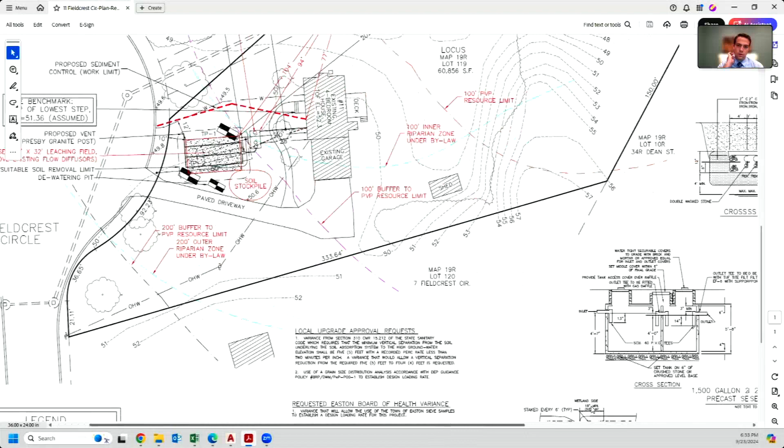Any questions from the commission on this one? Pretty straightforward, again a repair on a failed system. I think some of the feedback you got, and I just haven't seen enough of the plan to see if it's been revised, but is there a professional land surveyor stamp on here? Yes, there is. Very good. I also am seeing some notes about some small piles of lawn debris near the wetland. Yeah, I know, we added note number 8, just calling out the lawn debris near the wetlands to be removed by hand specifically. Okay.

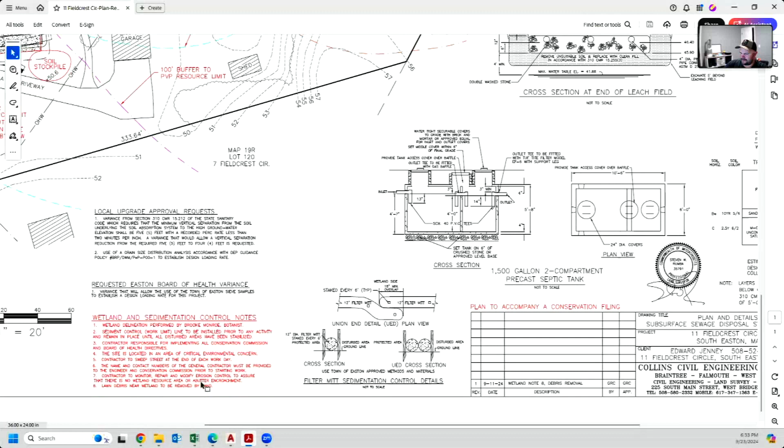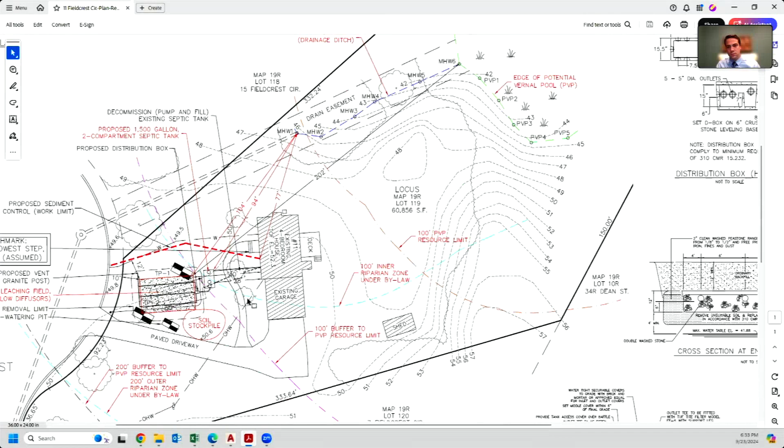I think that's all I had for questions here. Staff comment? Peter, this is just under the bylaw, is that correct? Yes. Okay, no other questions for me? Any other members of the commission? Any members of the public here tonight to discuss 11 Fieldcrest Circle?

All right, seeing none, Peter, I assume you'd like to close. Yes, please. Motion to close the public hearing for 11 Fieldcrest Circle. Benson, second. Carol motion, Benson second, roll call vote. Benson, aye. Carol, aye. Spady, aye. Vecchio, aye.

Motion to issue a negative determination of applicability, noting a -2 under the bylaw only. Spady, second. Carol motion, Spady second, roll call vote. Benson, aye. Carol, aye. Spady, aye. Vecchio, aye. Thank you, Peter. Thanks, guys.

So moving on to our next order of business, continued hearings and possible deliberations. First up is 557 Foundry Street, which is a notice of intent for redevelopment of Swifts Park. I think if I recall, we were waiting on a DEP file number here. Correct, we did receive that. It's 152-1821. Okay.

Is anyone here for this? I don't see Stephanie. I don't think there's an engineer here. As I recall, I think that was the last piece we were waiting for, and we've discussed the project as a board. Yeah, we have the revised plan with the surveyor stamp on it now, and we'll condition just changing around the plant species. All right.

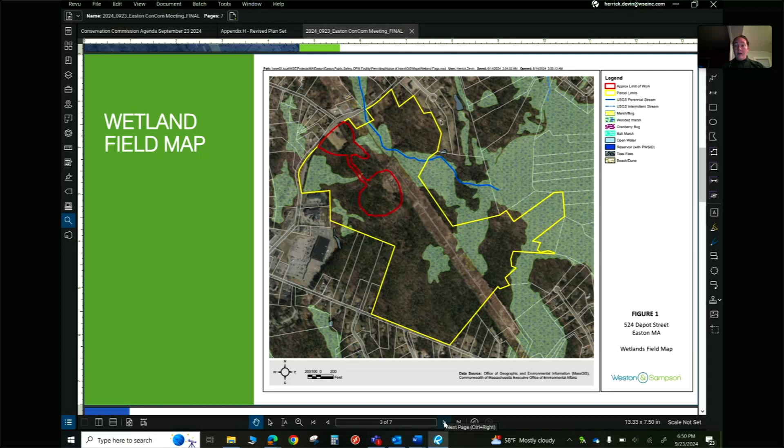So I believe everyone is familiar with the project team. As a refresher, we're looking at a site that is only a portion of a much larger lot. The approximate site is shown here in red. The wetlands are not perfectly shown because this came off of the Mass DEP layer, but just as a reminder, the wetlands end up crossing this access road in two places. On this southernmost crossing, there's an intermittent stream that goes through as well, which is resulting in a good chunk of our impacts.

About 2 meetings ago, we submitted some updates to some of the wetland resource areas. As a refresher, we're looking at some temporary impacts associated with some proposed debris removal. There's quite a bit of trash that was left out on this site from some of the previous activities, so this project does propose to remove a good portion of that, including 3,545 square feet within the BVW, which we are calling temporary impact.

We had also submitted a restoration plan to go along with this. We also have the temporary matting for equipment access to allow for that bridge construction, in the location of 2 crossings for that access road. The temporary mats were increased to be 12 feet in width, which resulted in 966 square feet of temporary impact to BVW, 256 square feet of temporary impact to land underwater, and 24 linear feet of temporary impact to bank.

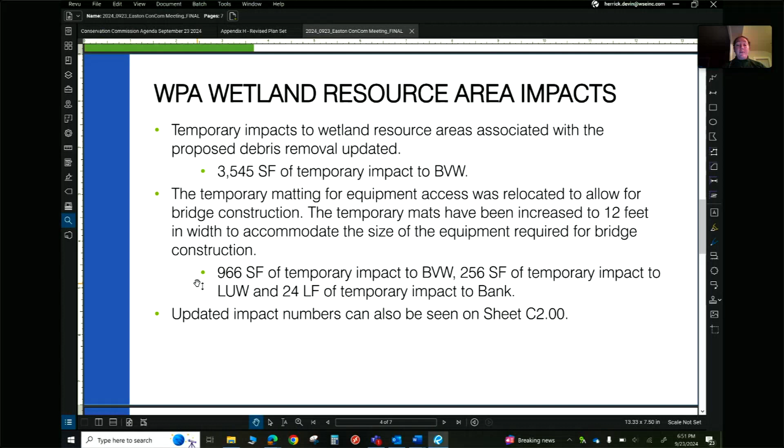Here's a table giving a summary. In total, we would be looking at 4,511 square feet of impact to BVW, 24 linear feet of impact to bank, and 256 square feet of impact to land underwater bodies.

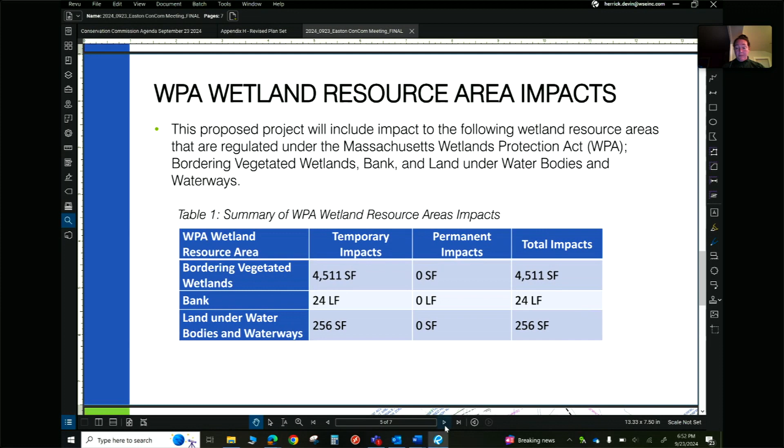Here's that trash mitigation plan for anyone who may be interested. As a reminder, it's kind of in patchy areas located throughout the site, but portions of that fall within the wetland, other portions fall within the buffer zone, extending up into the area of proposed development.

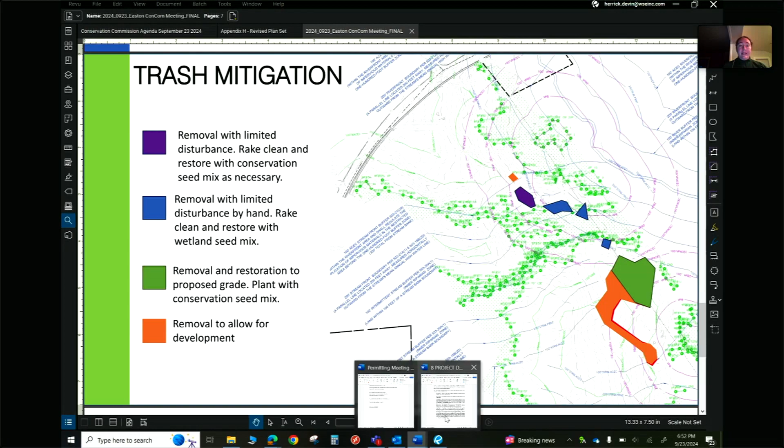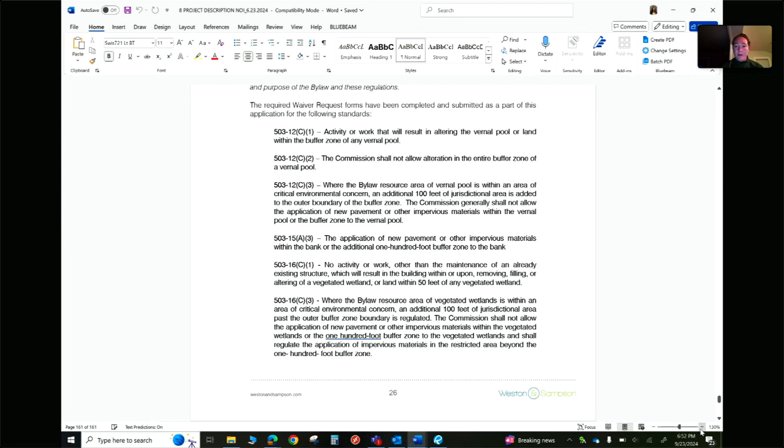I do also have here our list of all of the waivers to performance standards that we had sought. Let me see if I can make this a little bigger, because I'm realizing that's probably quite small on your screen. Starting at the top, we have a request for a waiver for activities or work that will result in the altering of a vernal pool or land within the buffer zone of any vernal pool.

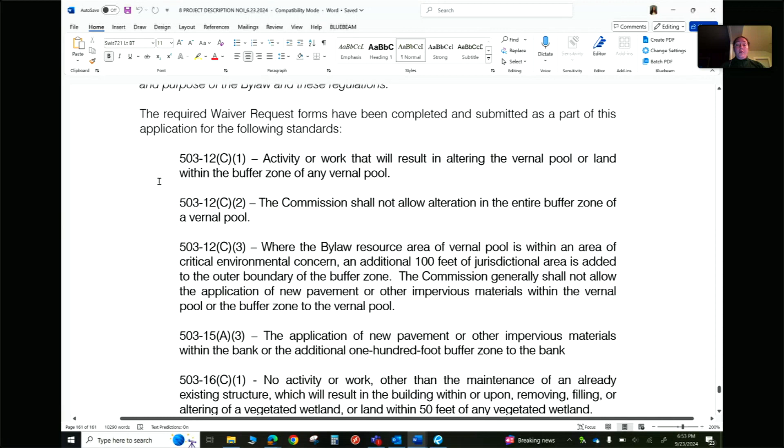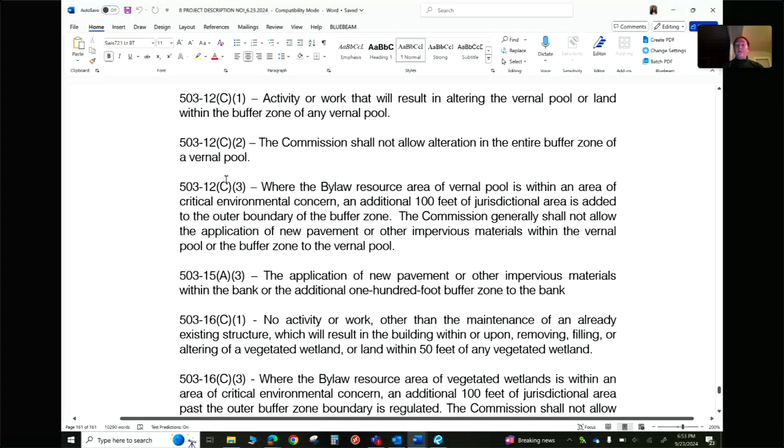We have a request for a waiver to allow alteration in the buffer zone of the vernal pool. I guess this is just C1 and C2, so we submitted waivers for both of those as memory serves. We also have C3, also associated with the vernal pool, within the area of critical environmental concern, where you're adding that additional 100 feet of jurisdiction.

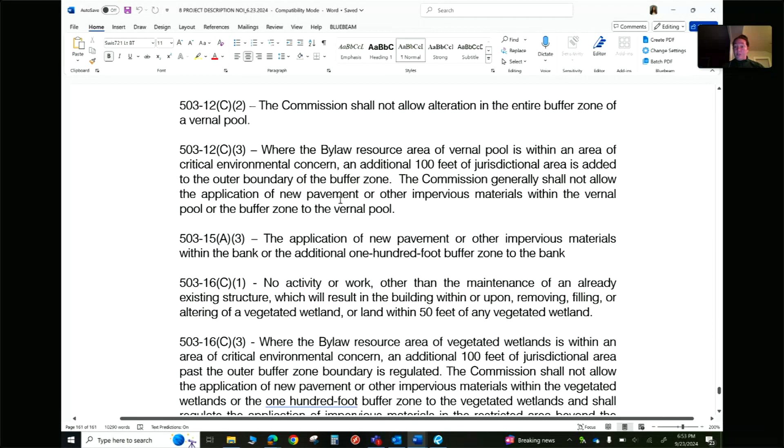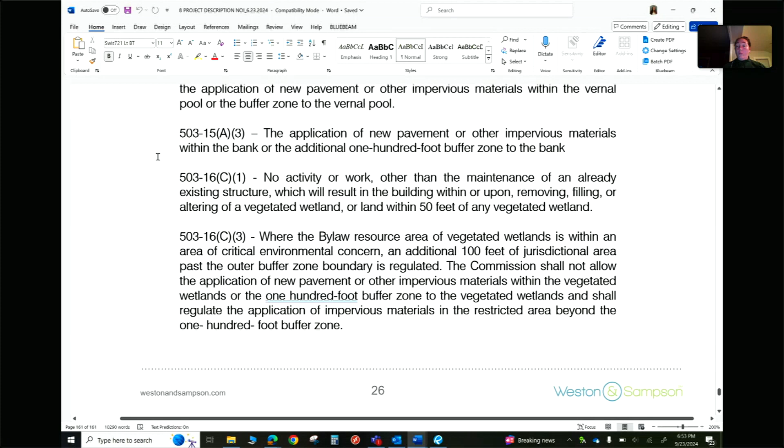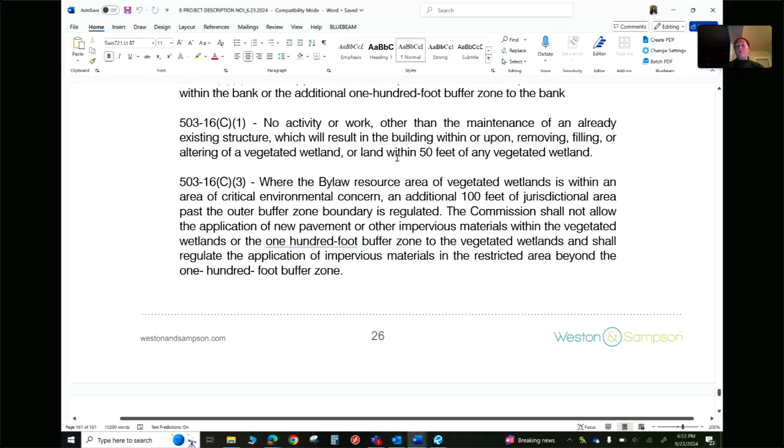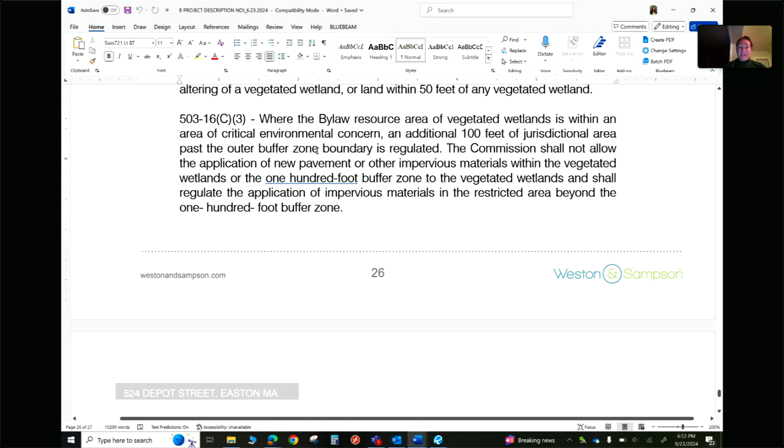We have the waiver for 15A3 for the application of new pavement or other impervious within the bank, or the additional 100-foot buffer to the bank. 16C, activity or work other than maintenance, altering of a vegetated wetland or land within 50 feet of any vegetated wetland. We have 16C3, which is that additional 100 feet of jurisdiction on the outer boundary for the ACEC once again.

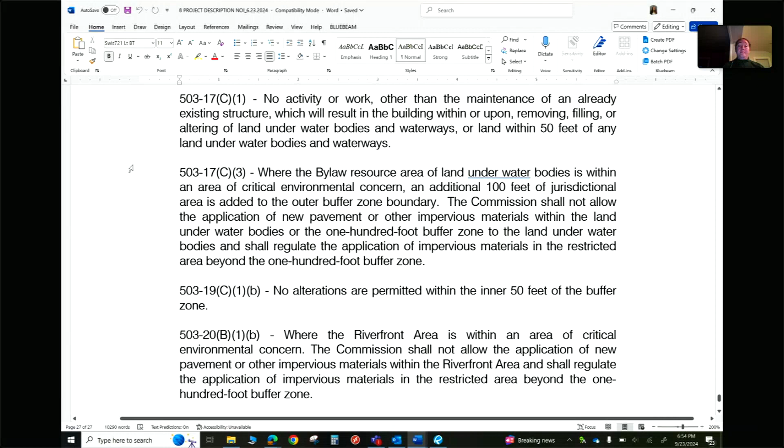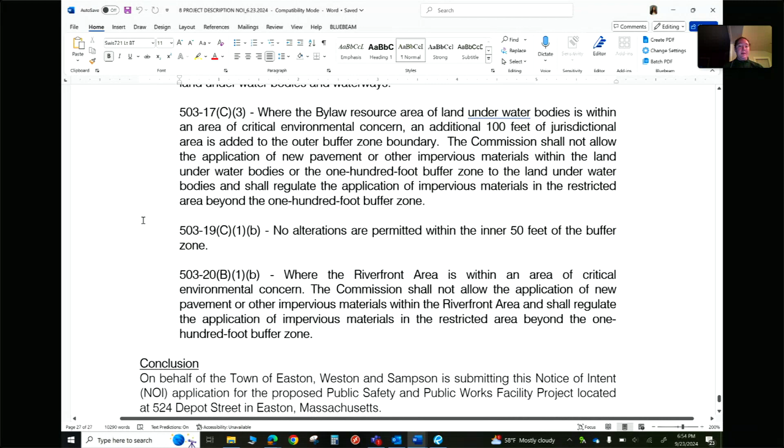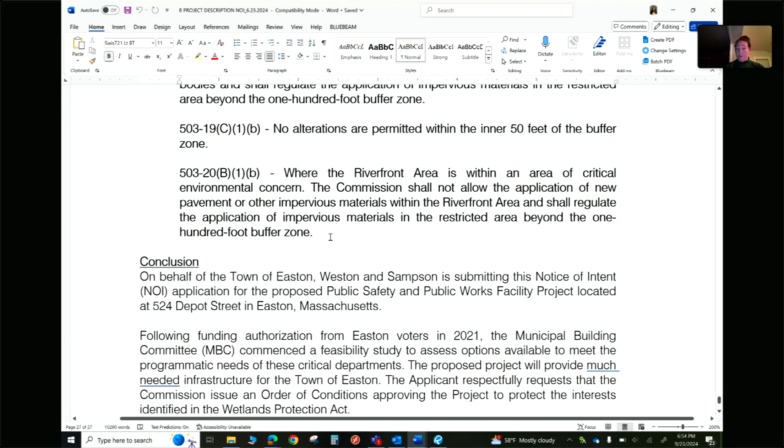17C1, that is land within 50 feet of land underwater bodies or altering land underwater bodies. 17C3, that additional 100-foot jurisdiction on the ACEC to the outer buffer zone for land underwater bodies. 19C1B, the inner 50 feet of a buffer zone. And 20B1B, where the riverfront area is within an ACEC, you do not allow application of new pavement or impervious materials, which we would be requesting a waiver to. I think that is all of them that we had requested a waiver to, but certainly open to discussing, especially if we missed one that we perhaps should have listed here.

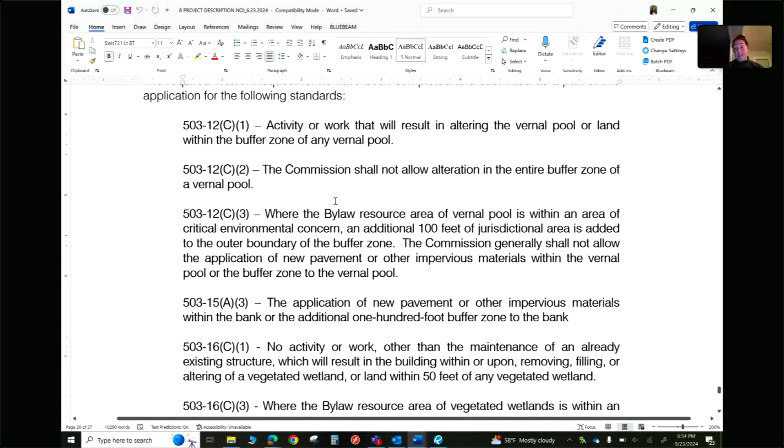Could you articulate the proposed public benefit?

Absolutely. So in this case, the proposed public benefit stems from the use of the proposed projects. We have that proposed DPW facility and the Public Works building, which will serve the community of Easton. As of right now, the existing buildings are not able to meet the needs for the infrastructure for the town of Easton, so we're hoping that this proposed project will be much needed infrastructure for the town.

This project cleans up about 22 tons of debris out on site, encompassing an area of about 50,000 square feet. There's a significant layer of refuse from the previous land use, mostly contained in the first foot of soil—really plastic bags, bottles, and things like that. The town will clean up the majority of that in proximity to the project; we haven't explored the whole 150-acre parcel, but the plans show the areas identified. This debris is often in the buffer or wetlands, contributing to ongoing pollution as it disintegrates into microplastic, so there's a considerable benefit given the proximity to a number of vernal pools.